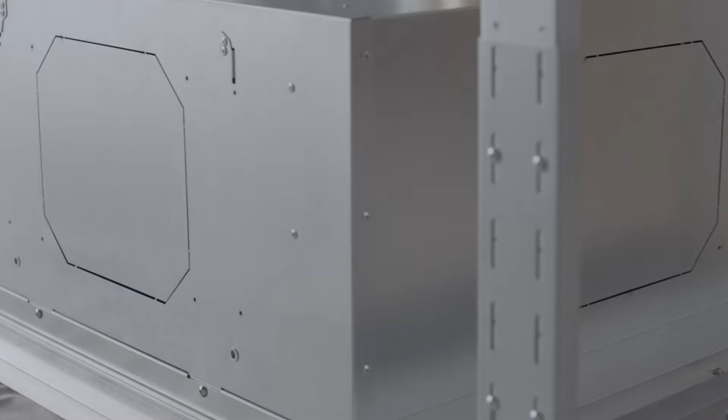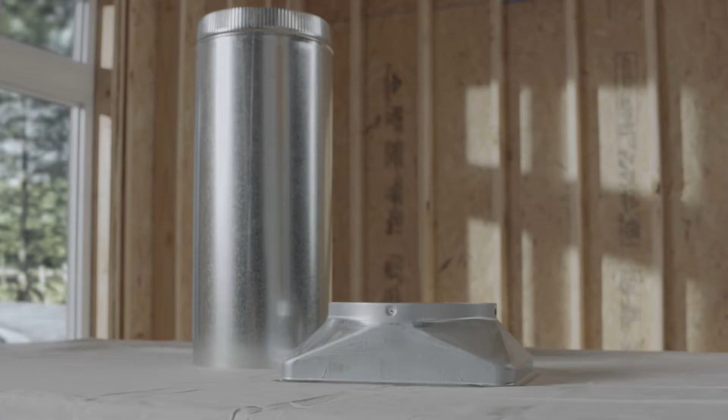The design of the HBC1 allows for multiple ducting options. To start, choose the desired blower outlet position. Note that a straight, short duct run using 8-inch round duct for a single internal blower, or 10-inch round duct for all other blower types, will allow the hood to perform most efficiently.

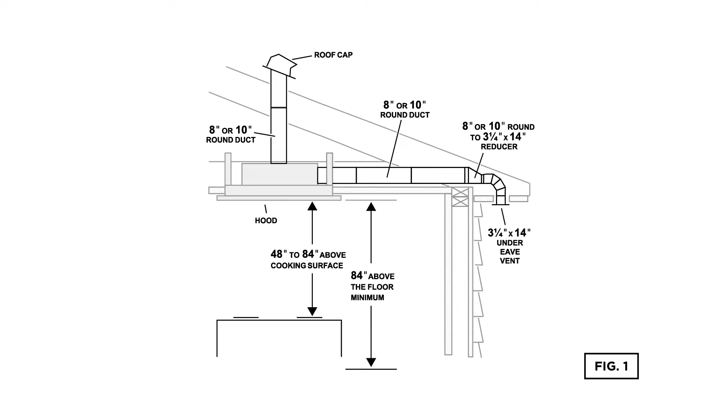Install a wall cap or roof cap. Then connect metal ductwork to the cap, and work back toward the hood location. Make sure to use 2-inch foil duct tape to seal the joints between ductwork sections.

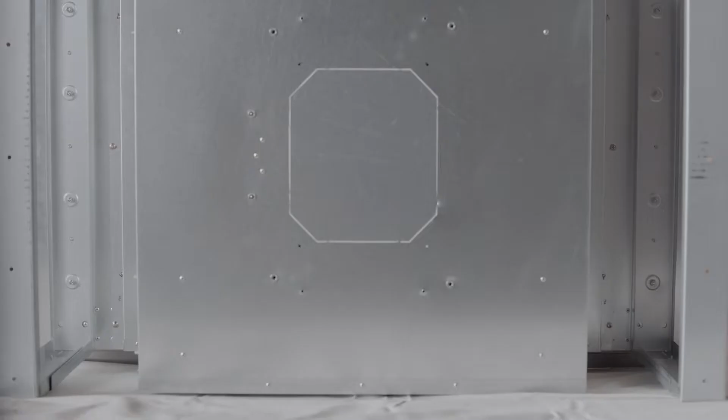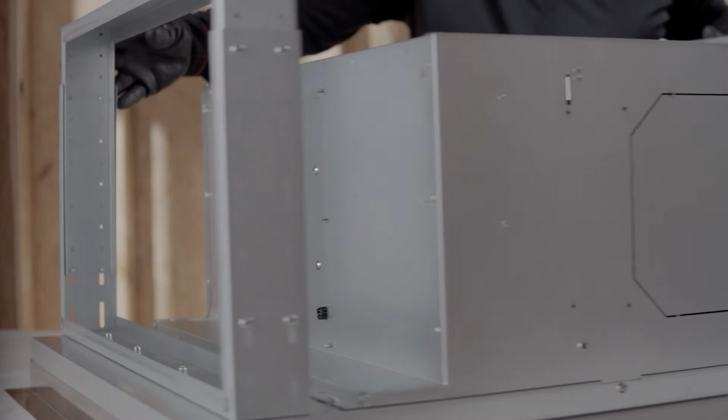Now let's work through the 4 possible blower outlet positions: top, front, back, and side. When using the side or top outlets, you can install the damper prior to mounting into the ceiling. Note that there is only one exit for side exhaust. Orient the unit so the side outlet is facing the desired direction.

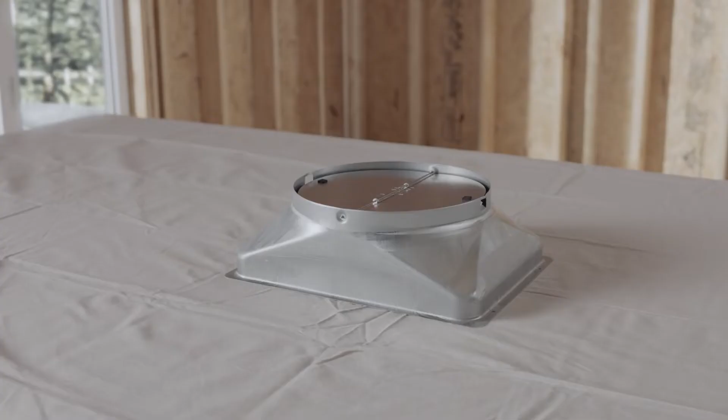In the case of front and back outlet positions, the damper must be installed on the housing once the hood is installed in the ceiling. The 10-inch damper included with the hood needs to be used for all exterior blower setups. It will also need to be used with the internal PM12 blower.

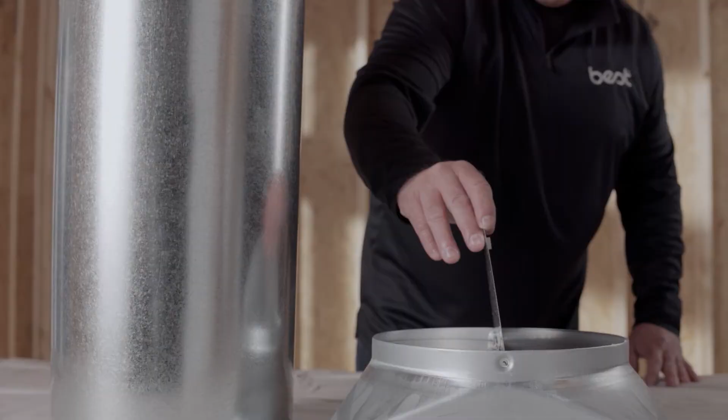With external blowers, the ducting connects directly to the damper with no rough-in plate required. The 8-inch damper is only needed with the PM6 internal blower. The hood is supplied with a remote to control the unit for ease of operation.

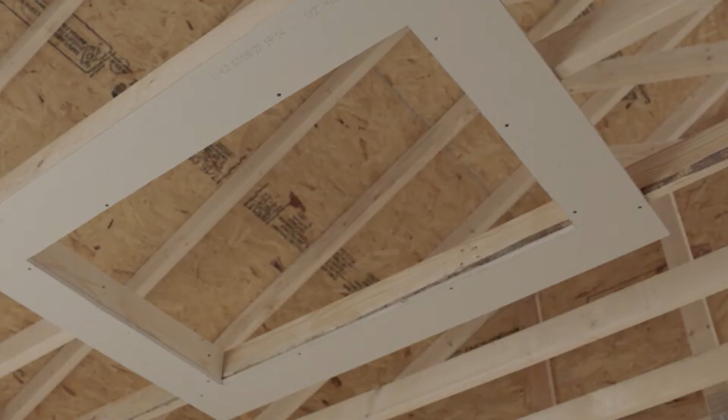When preparing the ceiling opening, the hood should always be centered over the cooktop. Make sure there is adequate space in the ceiling structure to install the hood and ductwork. You may be required to modify the structural joist, so be sure to follow and meet all local construction codes.

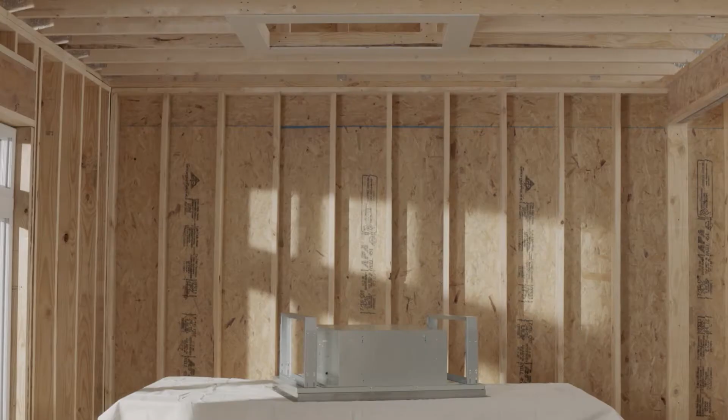The bottom of the hood must not be less than 48 inches. The recommended height is no more than 84 inches above the cooktop. This allows for the best capture of cooking impurities.

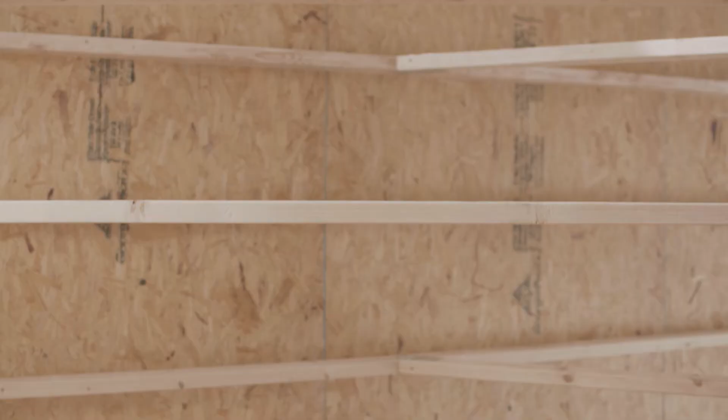You will want to use the appropriate size lumber to frame around the hood opening. To construct a wood framing system, you can follow this figure. The structure must be capable of supporting its own weight plus the weight of the hood. Keep in mind, the design may be different for your application.

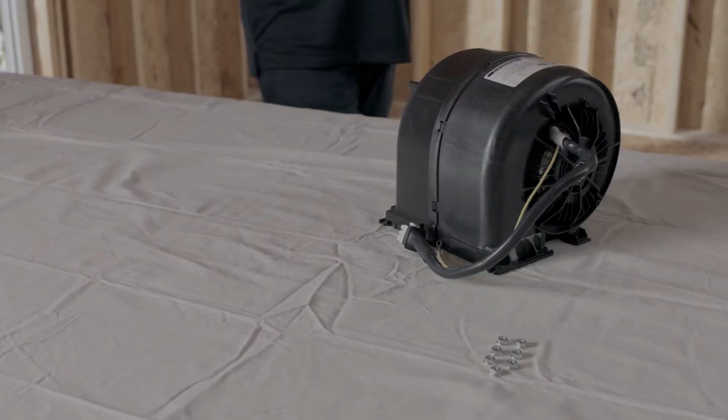Before installing the hood, confirm the blower to be used and consider the duct size to install. The PM6 is a single blower that attaches to this plate. The PM12 is a double blower and attaches to this plate. Attach the desired blower to the plate using the included hex nuts.

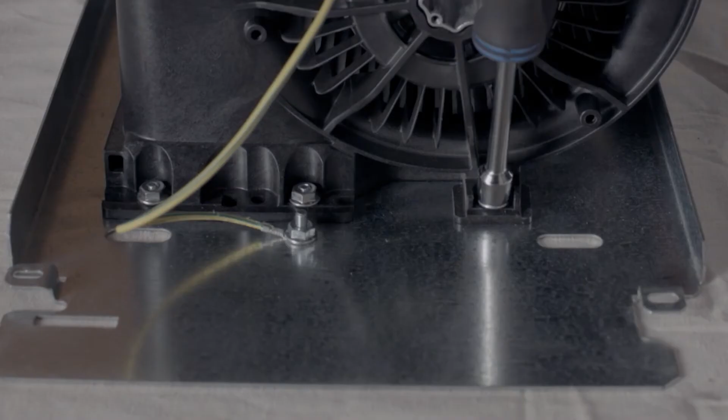Once you've selected the desired blower and exhaust position, you can install the blower into the hood. You can do this prior to or after mounting the hood. In this video, we are using the PM6 single internal blower and side exhaust position.

When using the PM6 blower, you will need the 8-inch damper that is included with the hood.

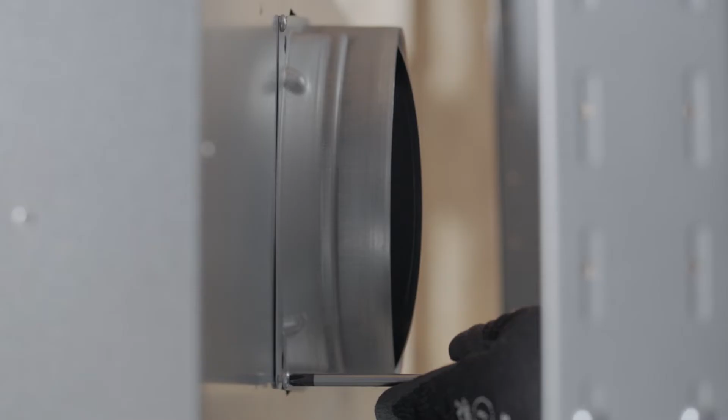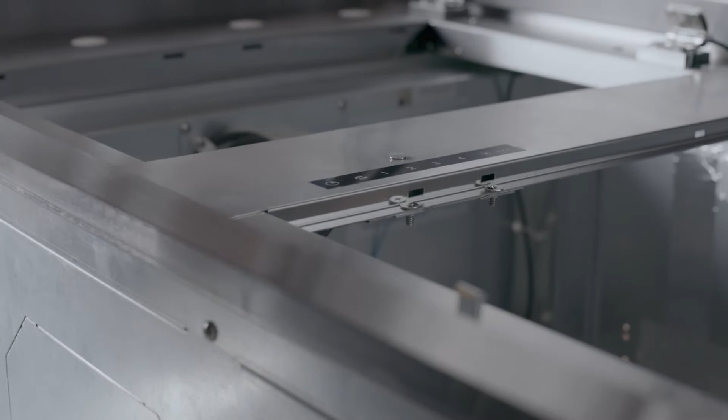Since we are using the side exhaust discharge position, we can now install the blower and damper prior to installing the hood, although waiting to install the blower after the hood is installed reduces weight.

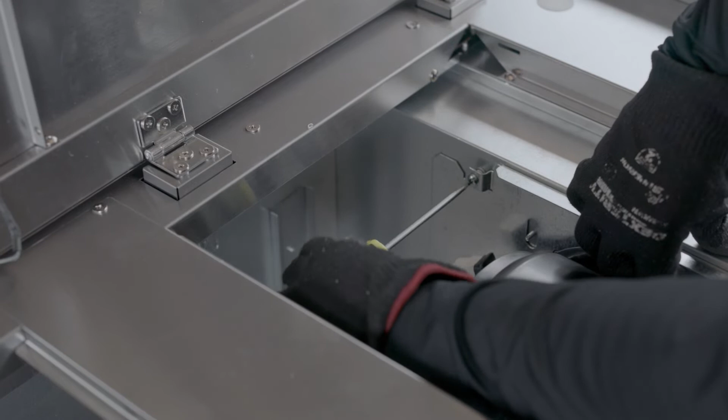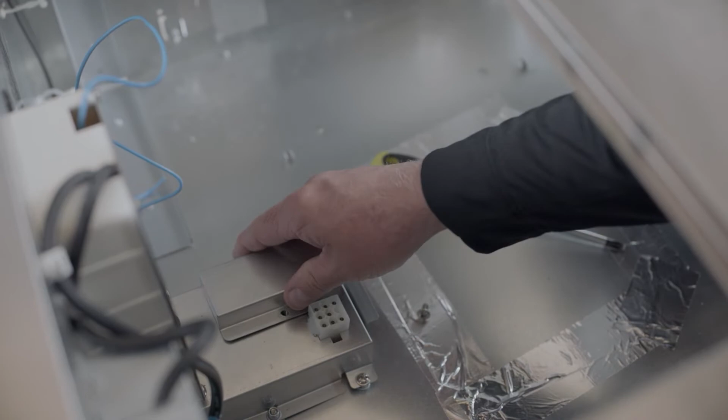Now, if installing the blower before mounting the hood, attach the blower plate to the hood in the desired position with the screws provided. Attach the ground wire from the blower to the ground stud. To connect the blower to the hood power source, swivel the connector plate to unhide the connectors, then simply plug the blower power cord into a connector.

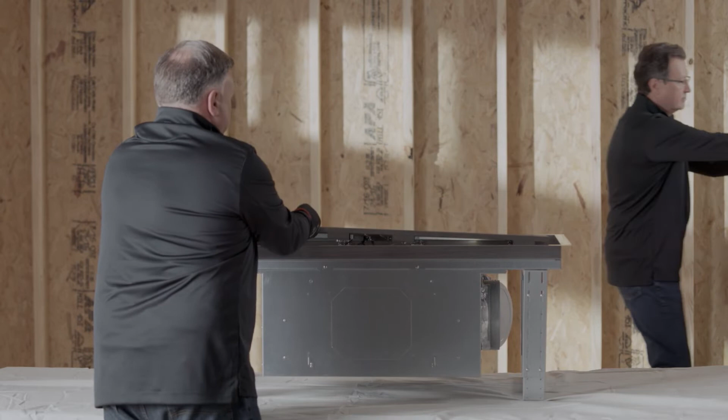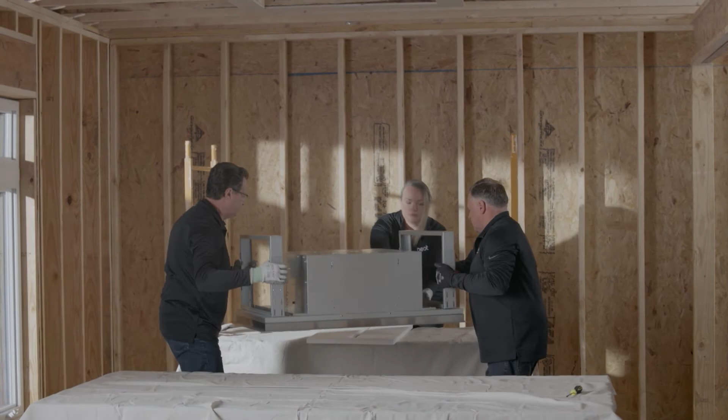With the blower in place, or if you are installing the blower later, you can now install the hood. Because of the large size and weight of this hood, there needs to be a minimum of 3 people for installation. Measure the frame support height and adjust the height of the telescoping support frame appropriately.

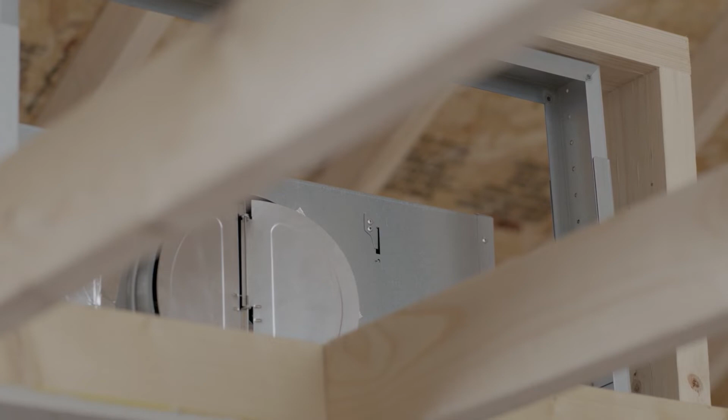This is to ensure a tight fit between the hood and the finished ceiling. The telescoping support frame height should be 1/8 of an inch less than the wood support height. This allows the hood to be drawn up tight to the drywall.

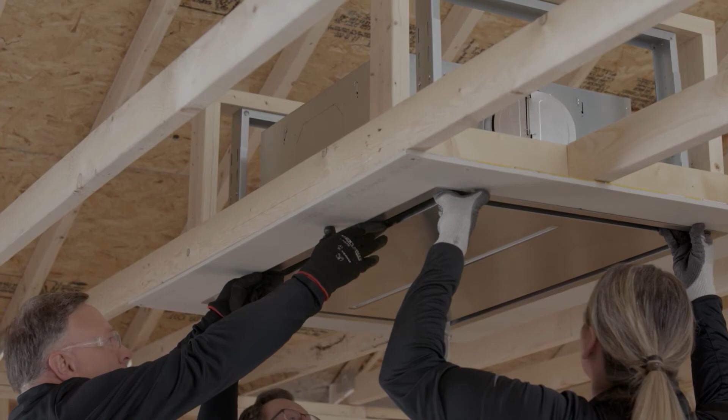When lifting or handling the HBC1, be sure not to lift on the bottom frame of the unit. This reduces risk of damage. Once set, lift the range hood into the ceiling opening. Secure each support frame to the wooden hood support frame using the screws provided.

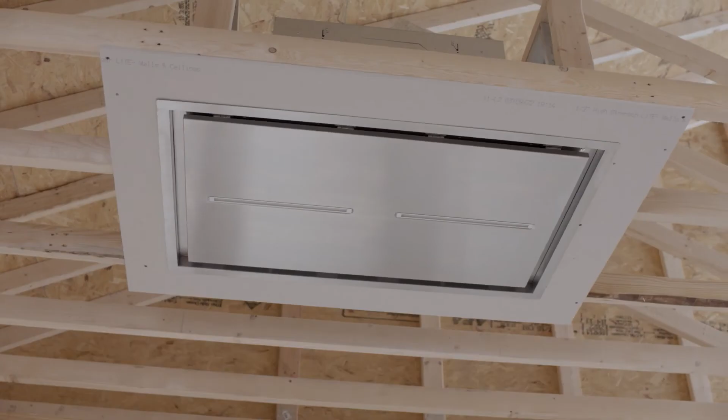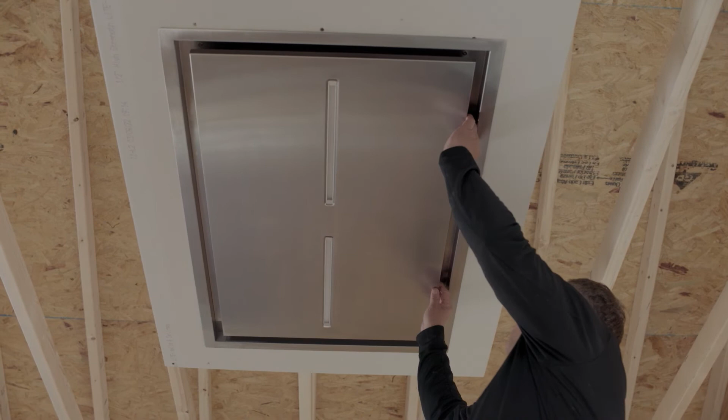With the hood now secure, you can begin to make all the electrical connections. To prepare the hood for wiring or installation of the blower, push in the 2 lock tabs on the ends of the perimeter panel. Then open the panel and make sure the mesh filters are out.

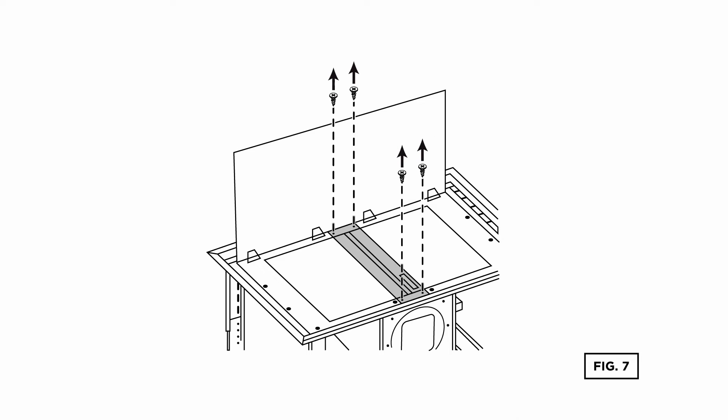To ease the access for blower installation in the case where the blower is installed after the hood is mounted, remove the central panel by unscrewing the screws.

To bring in the house power, install a UL-approved strain relief. Run the power cable in the housing, then secure using strain relief. Connect the power cable using included wire connectors.

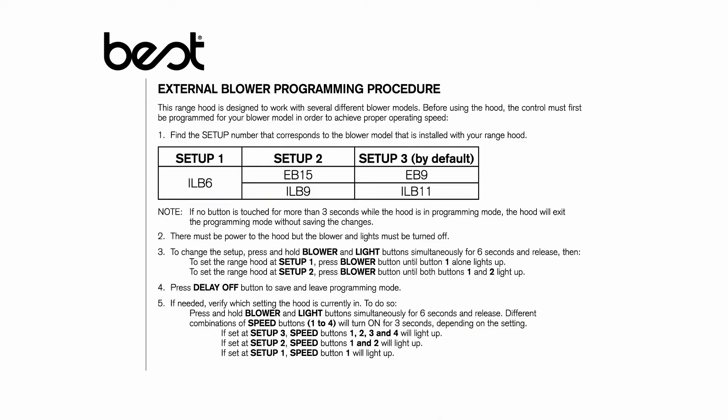The Best HBC1 also allows for external blowers. Here is a guide to the optional blowers this hood is compatible with, showing the blower and corresponding features.

Once the blower and electrical connections are made, replace the central panel and mesh filters.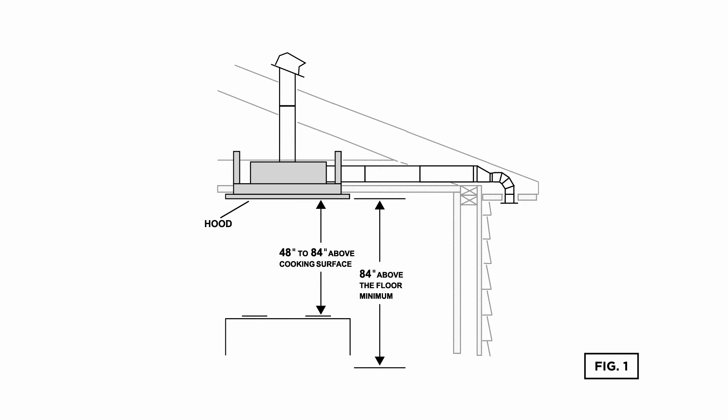Attach the range hood to the routed ductwork. Now power on the hood to test the controls. Use the control panel as well as the remote to cycle through each feature to ensure proper operation.

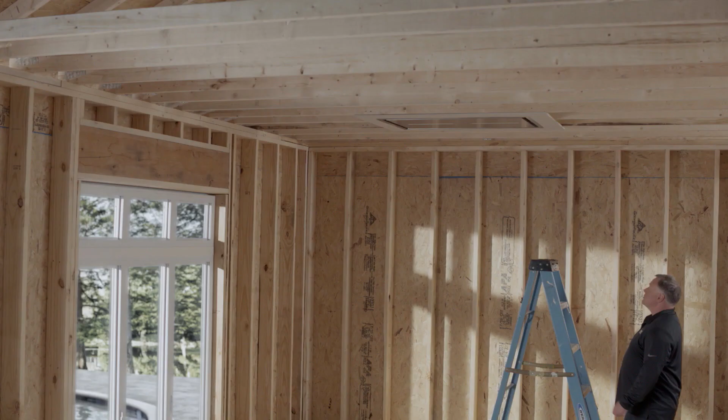Your range hood installation is now complete. For an inspiring kitchen with unobstructed views, the HBC1 Series Range Hood from Best.